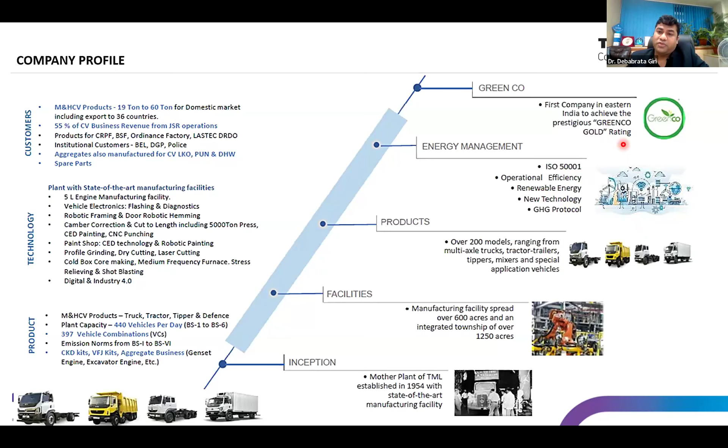We are an ISO 50001 company, and now we are embarking on a journey to use renewable energy. We have new technologies like CNG, LNG, EV, and H2ICE. We are the first company in Eastern India to achieve the prestigious Greenco Gold, which we received from our President, respected Droupadi Murmu, last year. And this is the pictorial form of our product portfolio.

Truck, then tipper, then tractor. I will explain what a truck is. This is the truck, used for carrying load, where load carrying capacity is 19 ton to 49 ton. Engine used are 5 liter and 6.7 liter.

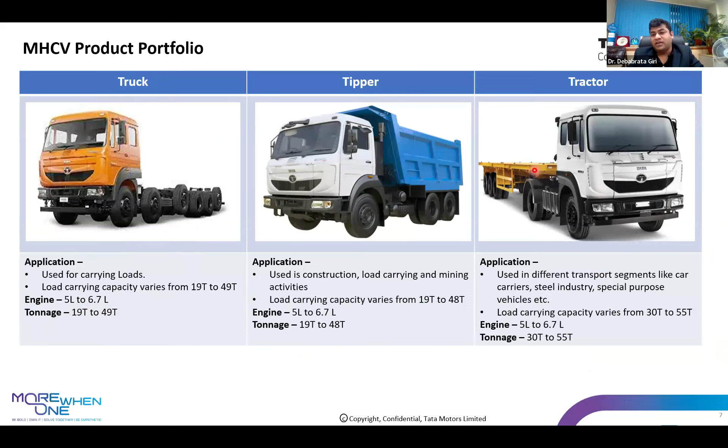Then tipper, used for construction, load carrying and mining activities. This is the tipping body, it can be lifted up for ease of operation. And these are the tractor, long vehicles carrying steel roll or car like that. This is the tractor.

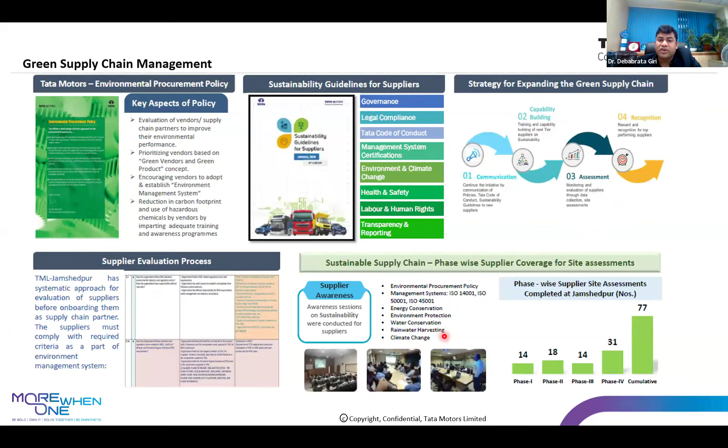I'll skip this. Green supply chain management, then sustainability guidelines for suppliers. We have made a guideline on how to achieve green supply chain. Then this is the strategy for communication, what to do. Then capability building at supplier end, periodic assessment at supplier end, and recognition for those who have done very well in sustainability. We have done a supplier evaluation process. Then these are some of the meetings we conducted for supplier awareness, and there is the number of suppliers covered.

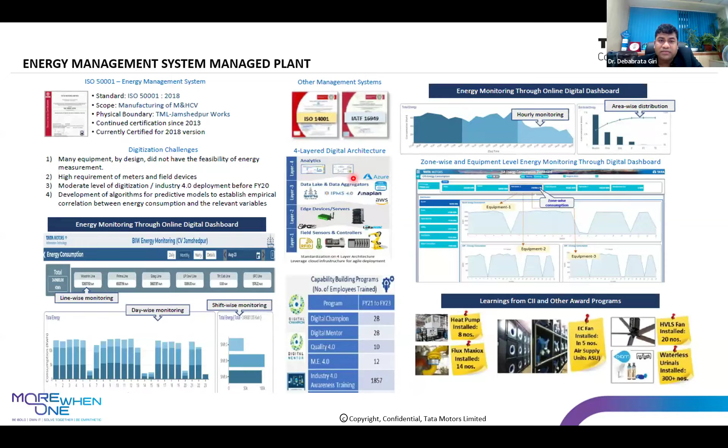Then there is something implemented at supplier end, and I will not cover this in detail, regarding energy management system, how we implemented Industry 4.0 and different types of digital architecture. I will not cover this.

Coming to the question, why electric vehicle? Why do we need to adopt electric vehicles? First of all, if you see the recent conflict between India and USA, it is all about fossil fuel. We are getting crude oil from Russia, that's why the US is not happy, Donald Trump is not happy. He's putting extra charges on what we are exporting to their country. So everything is about fossil fuel. If we adopt electric vehicles, our dependency on fossil fuel will decrease.

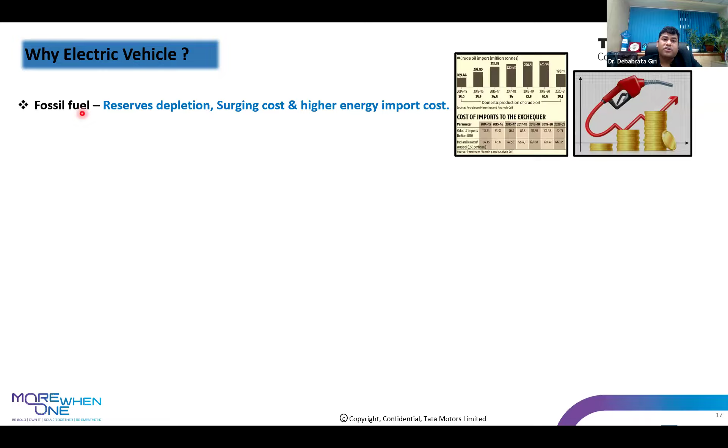Secondly, a country will grow if its trade deficit decreases, and a major chunk of what we import is crude oil. If we reduce crude oil import, trade deficit will decrease, and accordingly the country will grow. That is why we need to reduce this fossil fuel import, and that is why electric vehicles are important. Then there's also global warming and harmful emissions from ICE engines.

ICE engines generally contribute to CO2, CO, and NOx. So with adaptation of EV, global warming and harmful emissions will decrease.

Then coming to tailpipe emission, you will say if my source of electricity is not green, if I am burning coal to use the electricity, then what is the use of an EV vehicle? You will say total pollution is not decreasing because I am producing electricity by burning coal.

I will say there are two reasons to adopt the electric vehicle. One thing is, if I am burning diesel or petrol to run the vehicle, the efficiency of an ICE engine is very less, 18 to 20%. If I increase it, that is a big thing, improving the efficiency of an ICE engine. But the efficiency of a motor is very high, more than 90%. So one thing is efficiency.

Second thing is, if you are using an ICE vehicle, internal combustion engine, there is 100% chance that you are burning fossil fuel. But if you are using an electric vehicle, the source of electricity may be green or may not be green, but there are chances. If you are using electricity from solar energy, wind energy, or wave energy, then there are chances of green electricity. So two things: one is probability of generating electricity through green means, second is efficiency. That is why EV should be used.

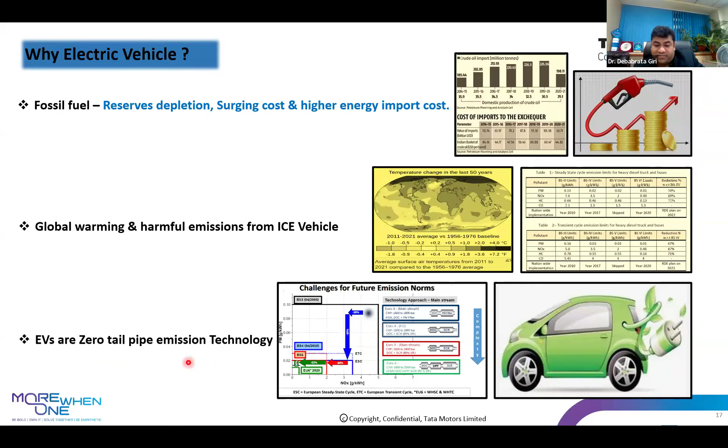Now coming to cost. If you see the cost per kilowatt hour year by year, it is reducing for high voltage battery. From 2013 to 2024, it has become one third, even more than one third, and we expect it will decrease further by 2026. That is another reason to adopt the EV vehicle, because cost is decreasing, so your initial cost for buying the vehicle will also decrease.

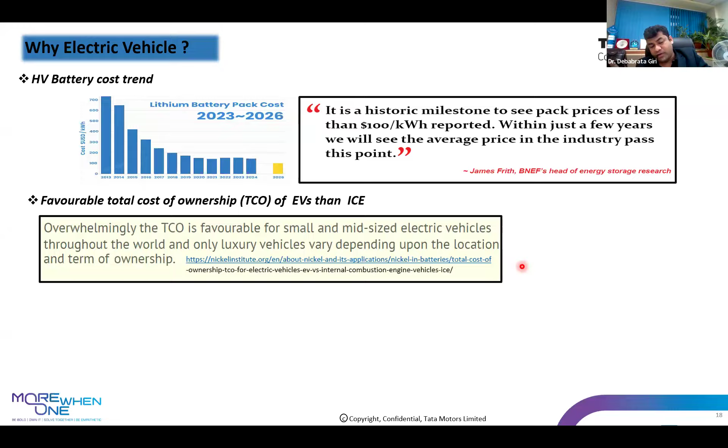Then total cost of ownership, I will describe this in a separate graph going forward. But total cost of ownership is also decreasing, and if you compare, the total cost of ownership is less than that of ICE, if you cover the total life cycle of a vehicle. Then high conversion efficiency, which I already discussed, the efficiency of an electric motor is more than that of an ICE engine.

Then coming to challenges of electric vehicles. First of all, EV architecture needs a lot of research and development. That is why Tata Motors got the first mover advantage in India for passenger vehicles. Tata Nexon was launched, and it has more than 50-60% market share, with other adopters following us.

Then infrastructure. In India, till now, charging station availability is a concern. So if there is no charging station, there will always be range anxiety, meaning for how many kilometers my vehicle will move and when I will get a charging station, that is still a concern. Then standardization of charging adapter, that we have already done. We raised this issue to the government of India, and now CCS2 type of charger has been standardized in India for both passenger vehicle and commercial vehicle.

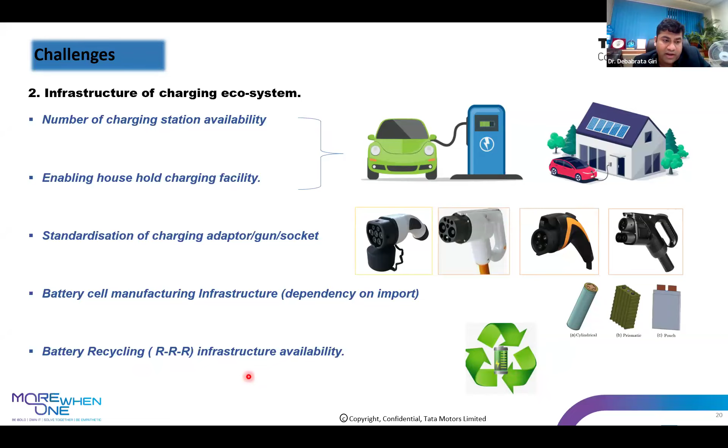Then another challenge is battery cell chemistry. How to select a good battery? There are many kinds of batteries, and this is the spider chart. The spider chart consists of specific energy, specific power, safety, performance, lifespan, and cost. So different types of lithium-ion battery have different performance considering different parameters. According to your requirement, you have to choose which battery you want to take. This is completely the OEM's responsibility, which battery they will take.

Then another thing is battery swapping technology. For battery swapping, you have to standardize the battery amongst all OEMs. Suppose one customer has a Tata Motors vehicle and another customer has an Ashok Leyland vehicle - the battery should be standardized so that they can be swapped with each other. For that, government and different OEMs should come together to make this available.

Then investment required. Now all OEMs are going forward for investment. Government is also investing on that, and government is providing discount through FAME. If you go for an EV vehicle, you will be charged only 5% tax, but for an ICE engine, you will be charged 18%, which before was 28%. If you go beyond 1500cc, you will be charged more than 40%. So government is already doing that - less taxes.

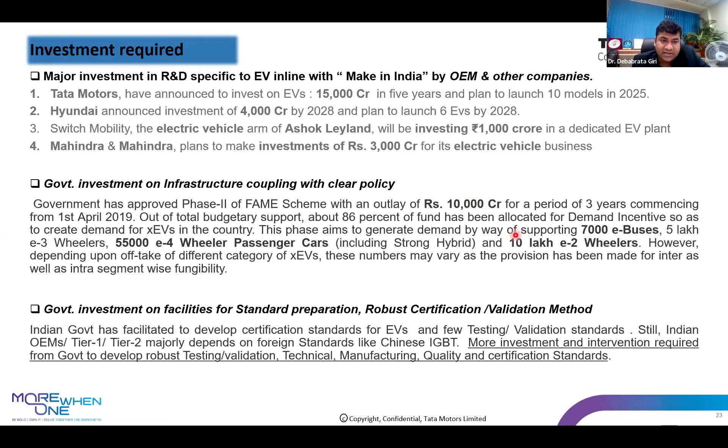Then second is customer sentiment. Still, customers are thinking that range is an issue, initial cost is an issue. So these are the challenges.

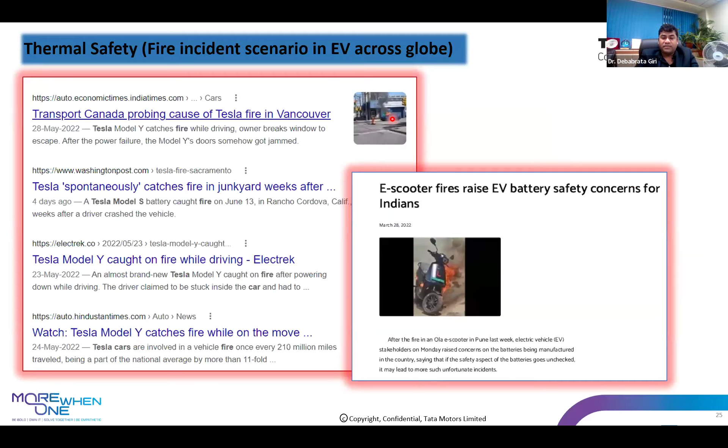Then thermal safety - you must have seen many news reports that Ola scooters have burned, many passenger vehicles have burned. That is the thermal issue. These are the challenges. For Tata Motors, you have never seen such an incident because we have developed a good thermal management system that takes care of the heat through traction cooling system as well as battery cooling system. We have a very automated system developed for this, and with this we are managing the thermal part of it.

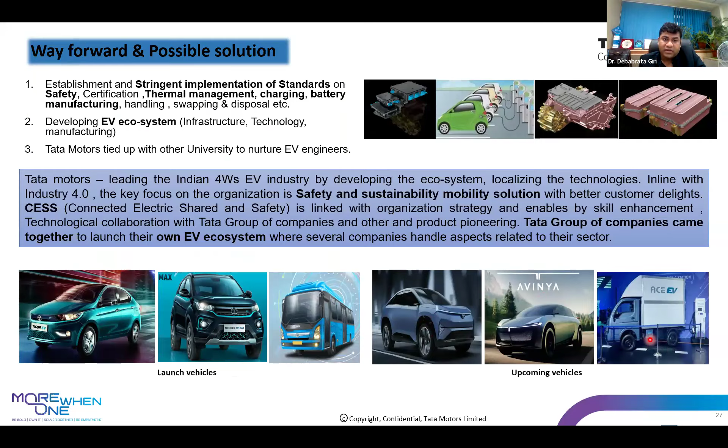And these are the way forward. In Tata Motors, we have launched passenger vehicles, buses, different high premium passenger vehicles, and small commercial vehicles that we have implemented and launched. And this will be the next EV vehicle we will be launching, called Avinya. We have already showcased this vehicle at Auto Expo, and we are going to launch this.

But despite contributing only 3%, trucks contribute 53% of the total particulate matter and 34% of the total CO2. So in short, you can say that trucks are contributing most to the pollution. So it is more important to electrify the giants - giants meaning trucks. It is more important.

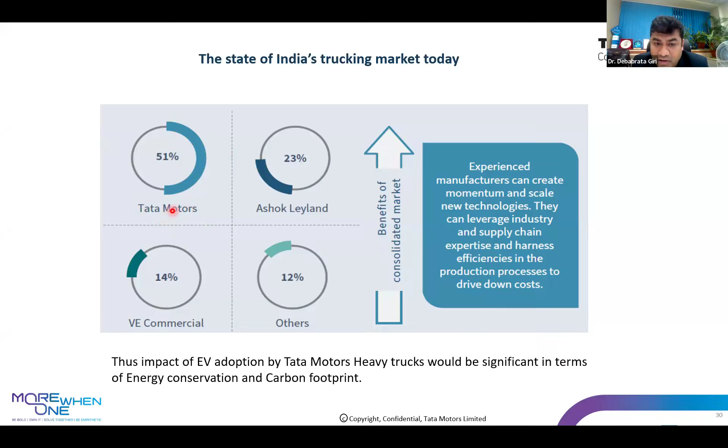Similarly, you can see this is another graph - if by 2050 we do electrification in heavy commercial vehicles, we'll have 9.6 million EV trucks on the ground, which will reduce 2.8 gigatons of CO2 emissions, equivalent to planting 46 billion trees. So you can see the impact - 46 billion trees. And likewise, this will be the effect on particulate matter and NOx.

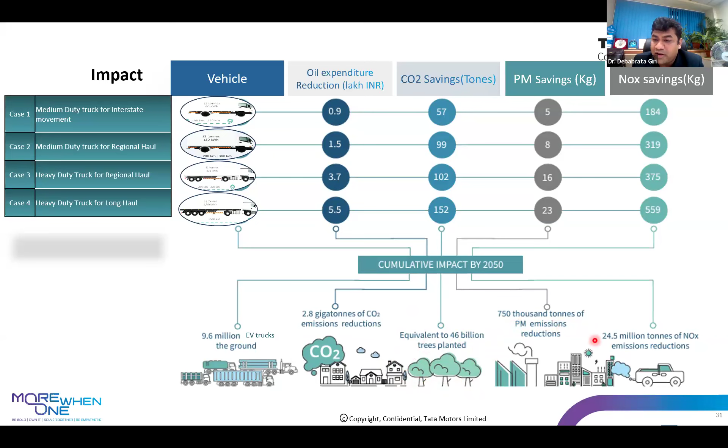Now the SCVs running on Indian roads are 40 lakh, and average distance per truck per kilometer is 80,000, and fuel efficiency is 3 kilometer per liter on average. But if it is a small truck, it goes up to 4 kilometer per liter, and if it is a big truck, meaning 55 ton, it is even less than 2. So average efficiency I have considered is 3 kilometer.

And energy consumption for electric, if I adopt electric vehicle, then it is only 1.2 kilowatt hour per kilometer. So diesel consumption per truck is this much, and total diesel consumption in billion liters is this much. Can you imagine? We are consuming 106.7 billion liters per year. And if you consider the calorific value of diesel, that is 36 megajoule, that is 10 kilowatt hour, then this is 1067 terawatt hour per year.

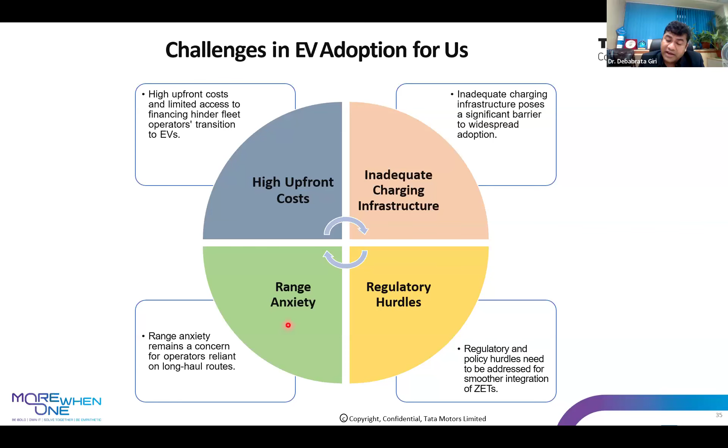Then we have discussed this driving innovation in EV. Then challenges also we have discussed, that is high upfront cost, inadequate charging infrastructure, regulatory hurdles, range anxiety. And then some suggestions on how to do faster integration of EV - successful EV deployment, operational feasibility, public-private partnership, and air quality impact. And this is the plan for scaling up EV adaptation.

And you can see we have made two types of electric vehicles. One is Prima 55 tonner tractor that already we have provided to Tata Steel. And these are some photographs when we launched this in March 2024. This is TV Narendran, MD of Tata Steel. Then Girish Wagh, our CTO. With their presence, we handed over some electric vehicles to our customer.

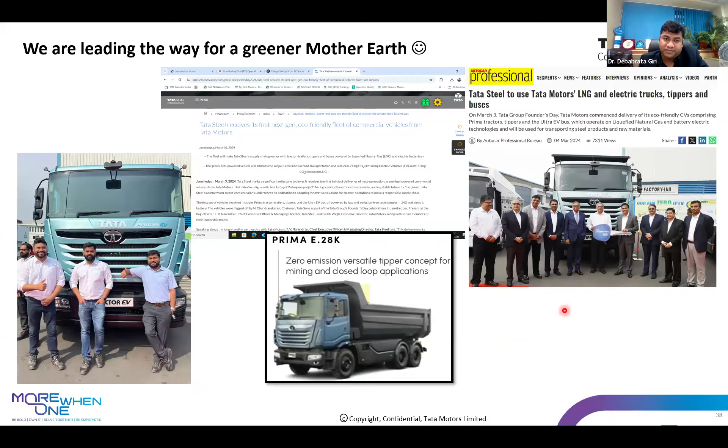That's it. Do you have any query regarding electric vehicle till now? Hello? Am I audible? Yes, yes, yes. If anybody has any query, you can ask me, because after that we will be moving to LNG and advanced systems in quality.

Sir, one question I want to ask. We are just, you told that we are moving to the electrification of heavy vehicles to reduce the CO2 and NOx emissions. So what about the production of electricity using coal or other factors that also contribute CO2 and NOx to the environment? So how will it be impactful, helpful to the environment?

See, there are three ways how it will be helpful. One is efficiency of internal combustion engine is only 18 to 25%. Efficiency of electric motor is more than 90%. So if you consider the efficiency, then electric vehicles are more efficient.

Suppose a truck is 49 ton. Out of 49 ton, 22 ton is the weight of the truck itself. So the payload that the customer will be carrying is 49 minus 22. That is the payload. For that payload, the truck driver or truck owner will be getting the money.

If I add both battery as well as engine, then the weight of the truck itself will go high, so the payload will decrease. That is why it is not advisable to bring both technologies into the truck segment, at least.

Thank you very much, sir. If anyone doesn't have any query, then we can move to the next chapter, the next advancement in quality. Should we move? Yes, yes, you can move. Thank you.

Coming to the next technology, that is LNG - basically LNG plus CNG. If you see, LNG and CNG have no difference; the composition of both is the same, methane CH4. The differentiation is only in how we are storing it. For CNG, compressed natural gas, we store methane at high pressure, 300 to 400 bar. But in LNG, liquefied natural gas, we store it at minus 162-163 degrees centigrade.

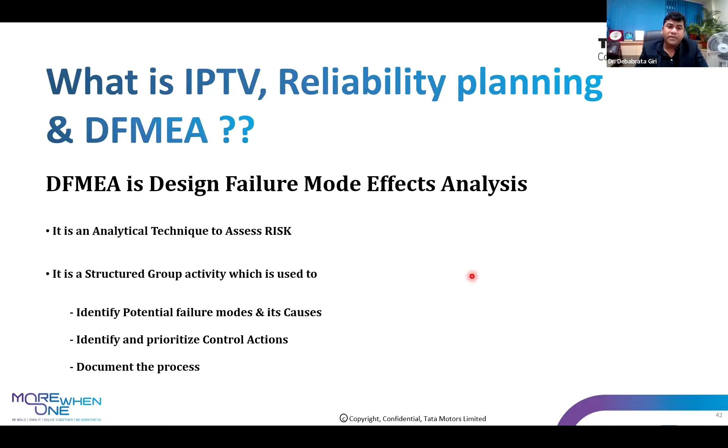It is the concept of DFMEA. So how is DFMEA done? This is the DFMEA sheet. Actually, there are many prerequisites to DFMEA. It is a very long process. I will not explain that because it is already 1 hour gone.

So in DFMEA, what we do? First, we write the function of a component. Suppose it is a seat - what is the function of a seat? We write it down here, then the requirement of the seat. Then potential failure mode - what is the potential failure mode? What can go wrong - no function, partial or degraded function, intermittent function, or unintended function.

And there is a standardized tool for how to identify this. There are pre-DFMEA documents. You have to use product structure tree, item function requirement, boundary diagram, parameter diagram, and robustness sheet. There are ways and means to identify these failure modes during design, which we adopt.

Then coming to whatever failure mode we have identified, we note the severity of those failure modes - what should be the severity. Then what are the causes of those failures? What design prevention actions can we take? What kind of design detection can we take? And what will be the recommendation action? So whatever we are designing - for component, subcomponent, assembly level, or vehicle level - we do this DFMEA, and only after completion of DFMEA do we launch the product. And whatever detection control we mention here, we do rigorous validation of the part and vehicle.

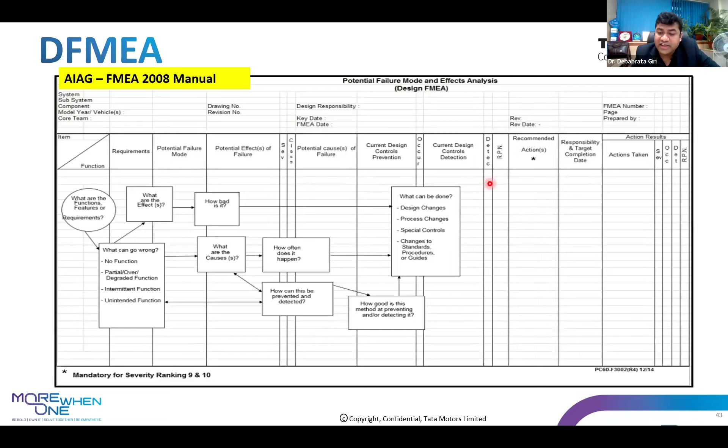So based on that, a detection ranking is given, and after multiplying severity, occurrence, and detection, you get an RPN number - Risk Priority Number. This RPN provides the priority to that particular failure mode. There is a scale for all three - severity, occurrence, detection - starting from 1 to 10. So the maximum is 10, minimum is 1, and multiplication of these three will be maximum 1000.

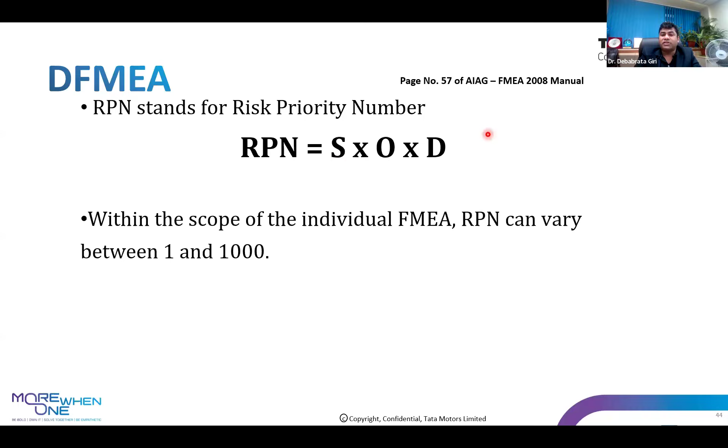Here is an example I have cited. Suppose failure mode A and failure mode B. For A, severity is 9, occurrence is 2, detection is 5 - the RPN number will be 90. For failure mode B, severity is 7, occurrence is 4, detection is 4 - the RPN number will be 112.

There is a table for how to rank the severity. Suppose one failure affects the safety of vehicle operation and it is non-compliance with government regulation, then severity will be 10. If it is without warning, severity will be 10. If it is with warning, severity will be 9. Accordingly, this ranking is decided.

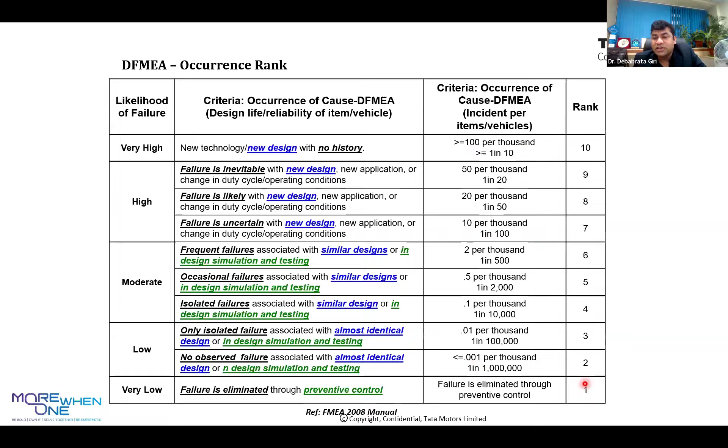Similarly, for occurrence, if the defect may occur 100 per 1000, ranking will be 10. If it is only 1, meaning 0.001 per 1000, ranking will be 2. Lesser is better, here also lesser is better.

Then coming to detection, detection is the same. So this is multiplication of severity, occurrence, and detection as the RPN number. Based on the RPN number, we have to prioritize the action and take the action, the prevention action as well as design action.

Then these are the basics. Now coming to this unified architecture. These are the objectives: we wanted to launch first time right, every time right, and a customer delight product. Then we want to integrate artificial intelligence into the quality system. Finally, we should get customer peace of mind. That is our ultimate goal.

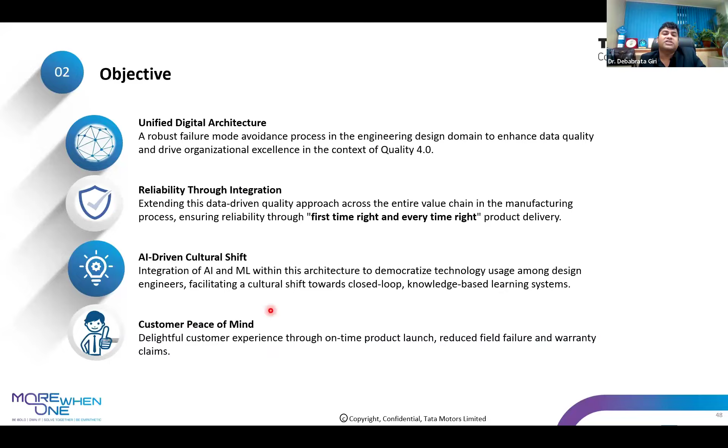So before that, what was the problem? Tata Motors field failure was very high. Our customers were unhappy, and our market share had decreased to 39%. This was the problem.

Systems were isolated, meaning there were multiple systems in Tata Motors and they were not talking to each other. There was no unified architecture, so that was causing delay in validation and new product launch. In the automotive sector, the more you launch new products, your market share will increase because customers adopt new technology. Because of disengaged different departments, our quality systems were not good, and due to high warranty cost, the product cost was also increasing.

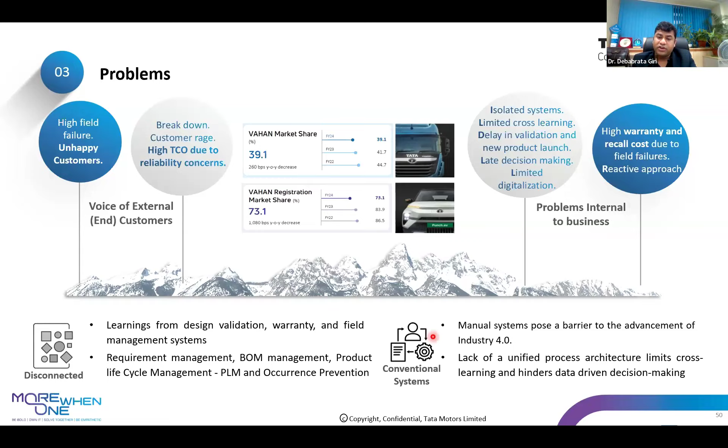So this was the problem: basically a disconnected and conventional system. There was no Industry 4.0. So what we did was standardize the process. Why is standardization required? Currently everybody is using artificial intelligence.

But one demerit of artificial intelligence is that it is a garbage in, garbage out process. Whatever prompt you provide to AI, whatever database AI is using for calculating or running the algorithm, a similar kind of response the AI will give. Suppose artificial intelligence is using its algorithm from a database, and in that database 100 people have written that the sun rises in the west, and 100 people have given a prompt that the sun rises in the west — accordingly the AI will give that output. That is one demerit of artificial intelligence: if polarization of data happens, artificial intelligence will give you the wrong answer.

That is why standardization of processes is required. Since we have standardized the DFMEA process, we ensure that this has been standardized across all functions. So this is the standardization and digitalization of the DFMEA process we discussed.

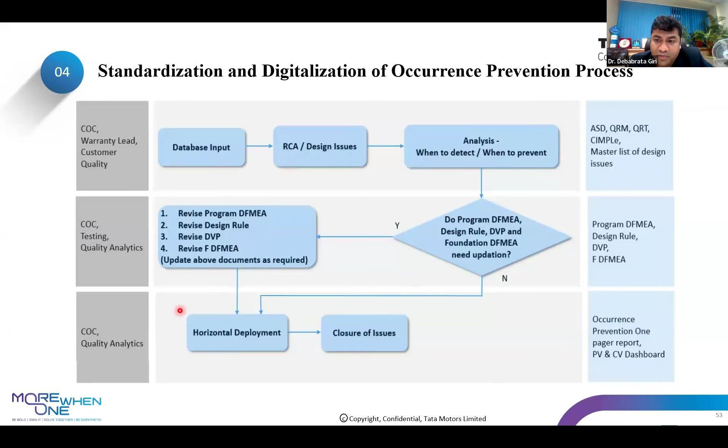And then this is the action part. Suppose we get one concern — we have a CIB system, critical issue voucher. We raise this issue in the CIB system, then it goes to the champion, then developer, then part provider, validator, then production part provider. Based on validation and closure, we close the issue in this workflow. This is the unified architecture we developed at Tata Motors.

Then for new technology, like EV, H2ICE, LNG, CNG, we benchmark the product, go to the market, go to our competitors, and look at different technical papers written on it. Whatever knowledge base we have, based on that we identify the failure modes and include them in the foundation DFMEA.

Past design learnings, and during validation, whatever concerns we get before launching the vehicle, we do extended validation. We run the vehicle for 4 lakh, 5 lakh kilometers, and whatever issues we get during validation, we get those corrected in our design and production. Then only we launch the vehicle. So whatever issue we get during validation also comes to foundation DFMEA.

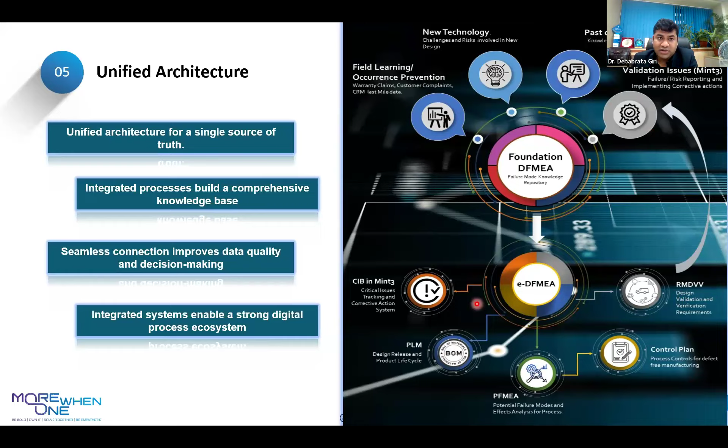After this unified architecture, we implemented artificial intelligence into the system. How did we implement it? First is building the knowledge repository, which I explained in the last slide.

Then we used artificial intelligence without breach of data security. We didn't want to share our data with the AI service provider, and that is the most important thing. We have developed our chatbot locally at Tata Motors, so that data will not be shared with ChatGPT, OpenAI, Perplexity, or other AI service providers.

Once we developed it in-house, what is the output of this AI? Now you don't have to ponder over data, which is in silos. You don't have to go to the silos and ask each department. You just ask the AI: what is the issue in X platform for Y aggregate, issue of X component fitting on Y aggregate in Z platform, or issue with severity higher than 3 on X model in Y platform.

Whatever you ask, suppose you ask what issues we faced in thermal management in electric vehicles, you will get the response from the past defect history, and it will provide solutions too. Whatever actions we have taken in the past as countermeasures for those defects, that data will be displayed. So it becomes very handy and easy for the designer to take action.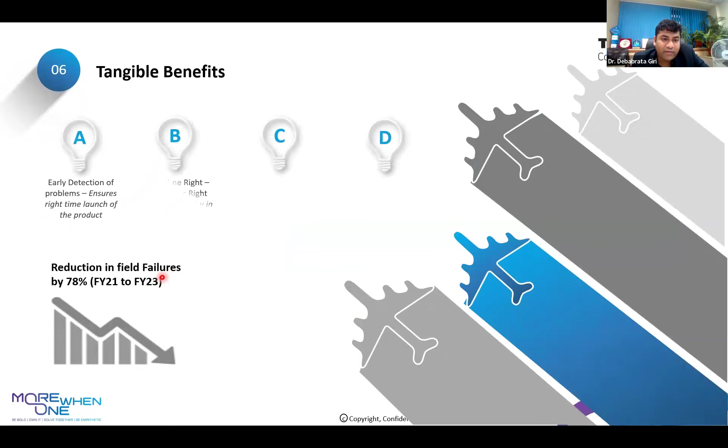So these are the benefits. Reduction in field failure — this is actually 2025, it was wrongly written in a hurry. 78% field failure was reduced.

Then first time right, every time right, and customer delight products used. Whatever new product we are launching, defects are very less, and cost of poor quality reduced by 78%. Productivity was improved, and cross learning between engineering and manufacturing. As an intangible benefit, during this process we applied for 6 patents from Tata Motors, and we got all 6 patents.

Market penetration was increased — now we have more than 50% market penetration, and brand value increased. These are some intangible benefits. That is why I discussed unified architecture, then positive customer output, and the journey ahead is now we want to horizontally deploy it in the manufacturing process.

So with this, advanced quality tool is finished. If anybody has any questions, please ask.

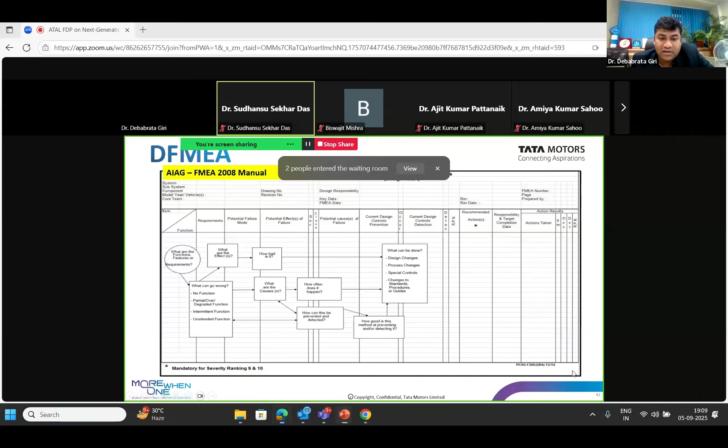I think many will have doubts regarding DFMEA because it is a very advanced tool and we are practically using it. So participants can ask questions.

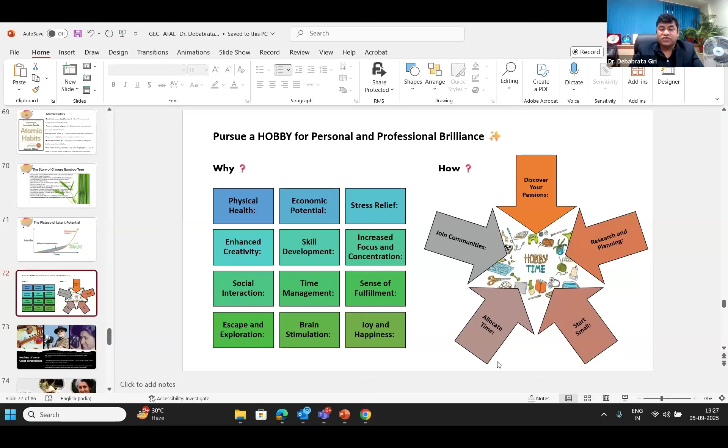So it is more important to strike a balance between work and life. So please pursue a hobby like this. Great men have pursued their hobbies. Like APJ Abdul Kalam, he used to play the Veena. Modi Saab has photography. Lata Mangeshkar had photography. Similarly, please pursue a hobby. It will balance you and reduce your stress.

Basically, why am I showing my hobby? I'm not glorifying my hobby, I'm just requesting you to please pursue a hobby. That is more important. And at the last, I will recommend that you make a life statement.

The life statement should include vision, mission, education, then hobbies, health, spirituality, relationship, and legacy - what you want to contribute to the society. Please write it down very clearly what you want to do. Then get it signed from your friend, your teacher, or your parents, so that it will be documented, and proceed in your life accordingly.

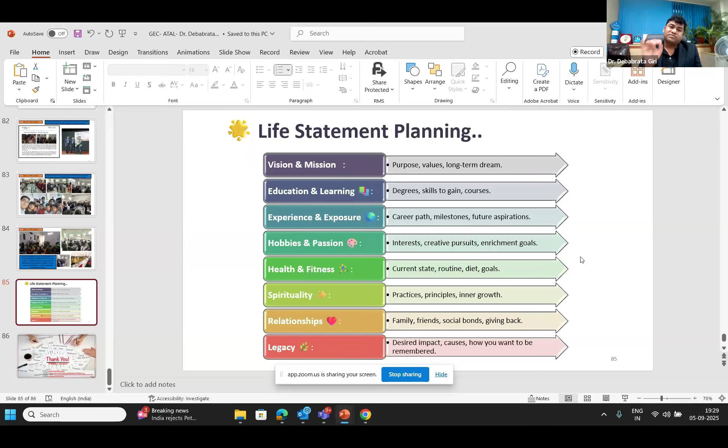But please sign a life statement. That is more important. I think we are done, and I have nothing more to share.

If anybody has any query, then I think only 1 hour was budgeted and we crossed it. Oh no sir, it is 1 hour and actually 30 minutes. It's okay. Any participants can ask any questions if you have any queries.

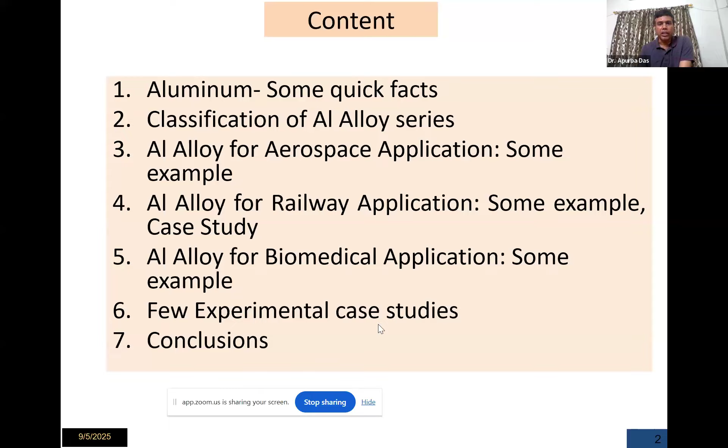As we know, aluminum is a lightweight material compared to steel. It has a density of 1/3, so its strength to weight ratio is always high—it has high specific strength compared to steel. So there is a huge advantage in weight, which is a governing parameter for aerospace industries, because weight is one primary constraint for aerospace industries.

Aluminum also has excellent corrosion resistance. It is anodizing friendly and manufacture friendly. It can be manufactured by rolling, extrusion, forging, casting, or in some cases additive routes. It is also weldable, which is one primary aspect of making this metal into any desired structure by cutting, welding, and fabrication.

Aluminum is 100% recyclable, giving it an embodied energy advantage, and its recycled feedstock is very high. So it can be used, and once its life cycle ends, it can be remelted and reused—that is one big advantage for aluminum. Aluminum is also widely available in nature, though it occurs in the form of bauxite.

Let me open my pointer. So 1350 is a 1 series alloy, used for power transmission because it has good thermal conductivity and electrical conductivity. Now the second category is the heat treatable alloy.

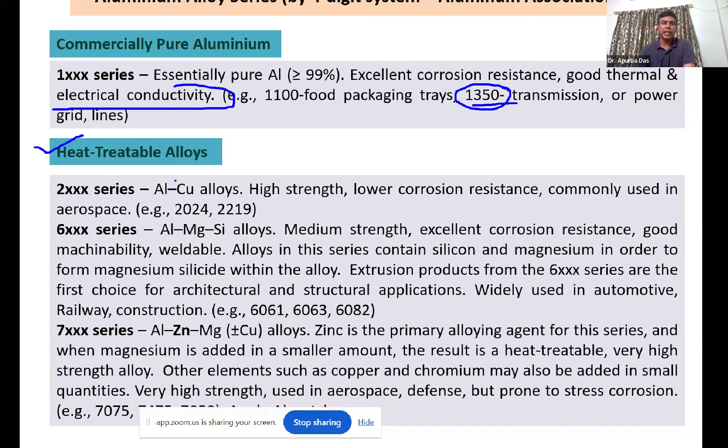Heat treatable alloy means we can perform heat treatment, which applies to the 2 series, 6 series, and 7 series. The 2 series is basically an aluminum-copper alloy, so copper is the main ingredient here. It has high strength and lower corrosion resistance, and is commonly used in aerospace because we need high strength, despite the lower corrosion resistance.

2024, 2219, these are the alloy used. Next is the 6 series alloy.

6 series alloy is aluminum-magnesium-silicon alloy, where magnesium is basically the governing main ingredient. So it is medium strength, having excellent corrosion resistance, good machinability, and weldable. Alloys in this series contain silicon and magnesium in order to form magnesium silicide within the alloy.

Extrusion products from the 6 series are the first choice for architectural and structural applications. It has wide application in the automotive domain and the railway domain, like 6061, 6063, 6082. I will explain these alloys because they have very good application in the railway domain.

Next is the 7 series alloy. 7 series alloy has zinc as the main ingredient, apart from aluminum, along with some part of magnesium and some part of copper. So zinc is the primary alloying element in this series, and when magnesium is added in a smaller amount, the result is a heat treatable and very high strength alloy. Other elements such as copper and chromium may also be added in small quantities.

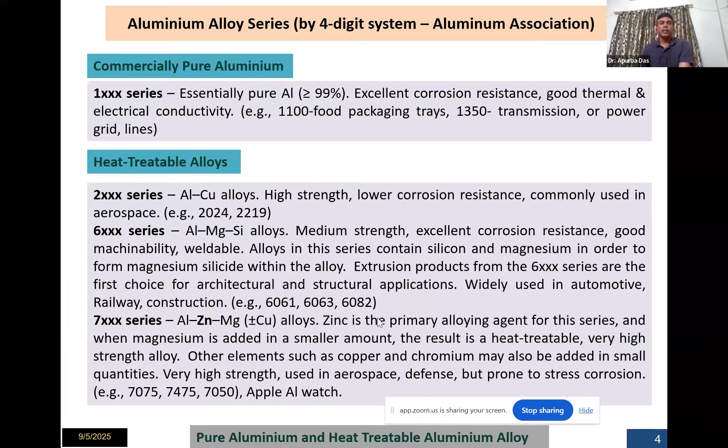Third one is the non-heat treatable alloy. Non-heat treated alloys are strengthened through cold working because they cannot be heat treated. So they need to be strengthened through cold working. Cold working occurs during rolling or forging methods and is the action of working the metal to make it stronger, and cold working increases the strength of the metal.

Alloying elements such as magnesium intensify its effects. In some cases, other elements can be added. So in this category, there are several series: 3 series, 4 series, and 5 series.

In 3 series, it is aluminum-manganese alloy. It has good corrosion resistance, moderate strength, and is commonly used in roofing or siding locations. This is generally used. And 4 series is aluminum-silicon.

Silicon is the main alloying element here, added in sufficient quantities to lower the melting point of aluminum without producing brittleness. It has good wear resistance, low expansion, and is used in automotive engine parts like 4032 or 4045 series.

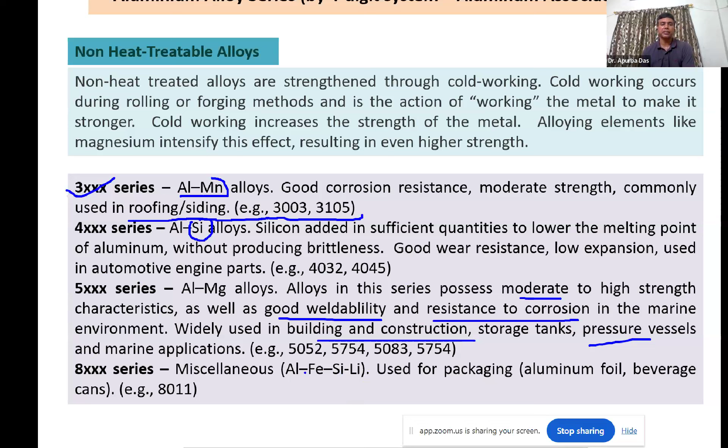So in a nutshell, these are the series of aluminum alloy based on their configuration. First series is pure aluminum, which has more than 99% aluminum.

Second series is aluminum-copper - copper is the alloying element. Third is manganese as the alloying element. Fourth is silicon as the alloying element. Fifth is magnesium - sorry, third one is manganese, fifth is magnesium. Sixth is magnesium-silicon alloy.

It is added with aluminum. Seventh, zinc is added as the main alloying element. 8 series is lithium, and 9 series is other alloying elements, which we may use in some cases.

So this is just a brief introduction about the different series of aluminum alloy based on different alloying elements added to aluminum, because pure aluminum does not provide that much good strength. It needs some alloy added, and based on this addition, some series are heat treatable and some are not heat treatable. Depending on the application, we can see which series of this alloy is applicable to which sector.

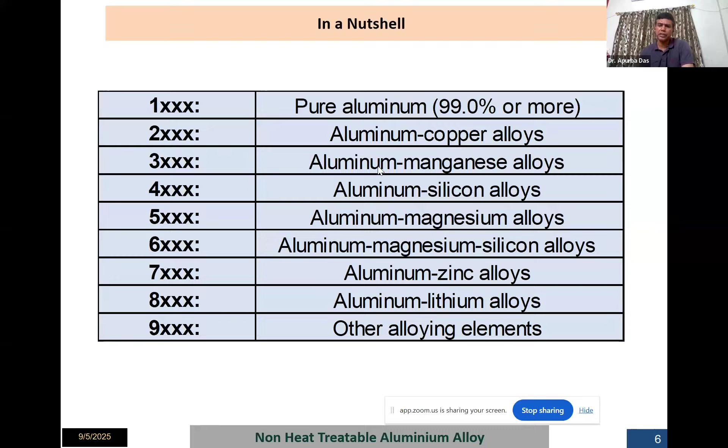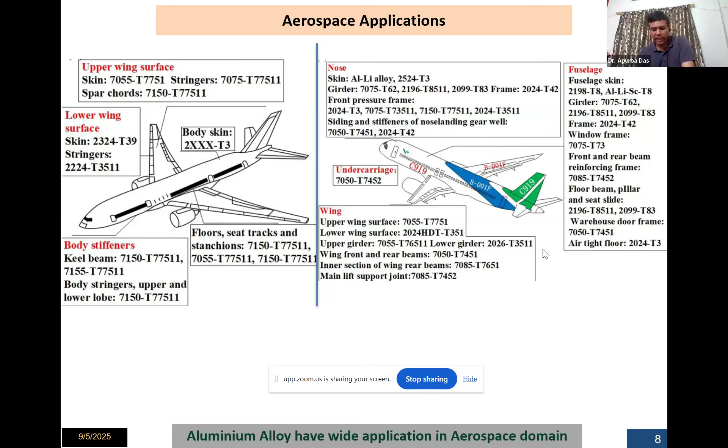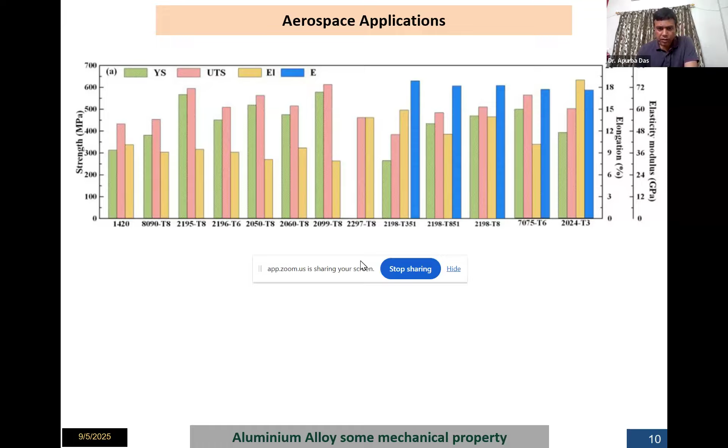The main objective of using this aluminum alloy is to reduce the tare weight. That means if the tare weight increases, then obviously the thrust needed to fly is high, the fuel consumption goes high, and a lot of aerodynamic effects disturb the motion. So the main objective is just to reduce the weight, and the best available and most comfortable material is the aluminum alloy. That's why aluminum alloy is widely used in the aerospace domain.

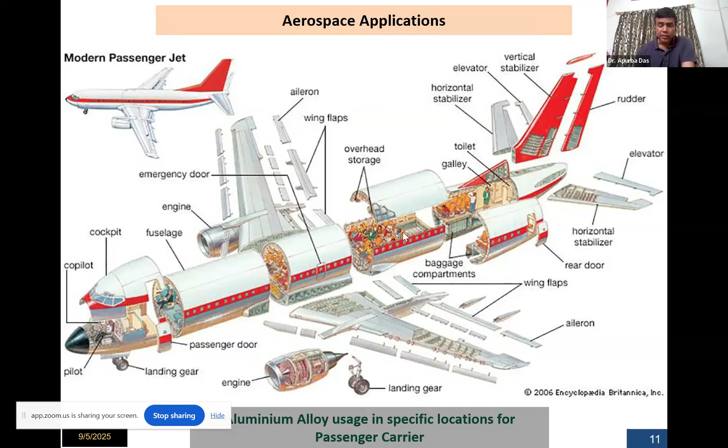In aerospace applications, the spectrum of aluminum alloy used ranges from the 1 series to the 7 series, though the 2 series and the 7 series are widely used.

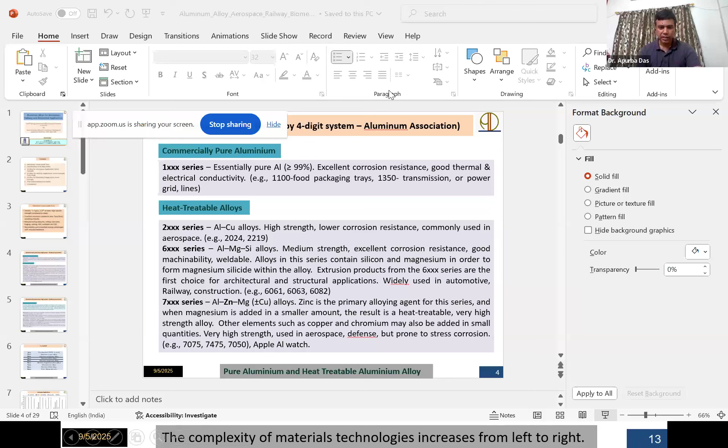As you know, aluminum alloy is not very capable of withstanding temperature. So in the aerospace or flight domain, there are two engines, which are basically gas turbines - we call them aeroderivative gas turbines. Inside the gas turbine, the temperature goes around 2000 degrees centigrade. So inside the engine we cannot use aluminum alloy, because it cannot take that much high temperature, unless we use some coating like alumina or zirconia.

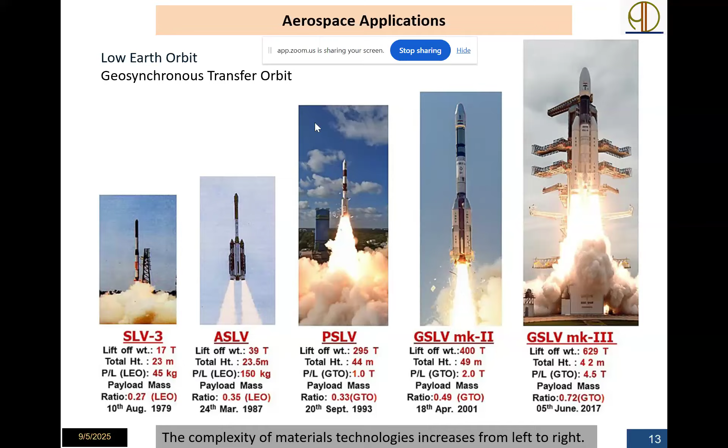So we need other materials which can withstand high temperature, like Hastelloy, Nimonic. In the gas turbine domain, where high temperatures exist, we cannot use aluminum alloy - there we need advanced alloys like Hastelloy, Nimonic, nickel-based alloys. Those alloys can withstand high temperature, and we also need to provide a thermal barrier coating, TBC. So that is one limiting area where we cannot use aluminum alloy in the aerospace domain.

Now I'm moving to aluminum in the railway location, or the railway domain.

In railway, we know that there are three modes of transportation generally we have. One is the metro, another is the passenger coaches, and another is the wagons, which is generally used to carry the commodities.

In the metro, previously our metros were built with steel bodies. Now, from the last 5 to 6 years onwards, metros are no longer manufactured with fully steel bodies. Now it is moving towards aluminum bodies, and India's first indigenous metro, Pune Metro, was built with an aluminum body.

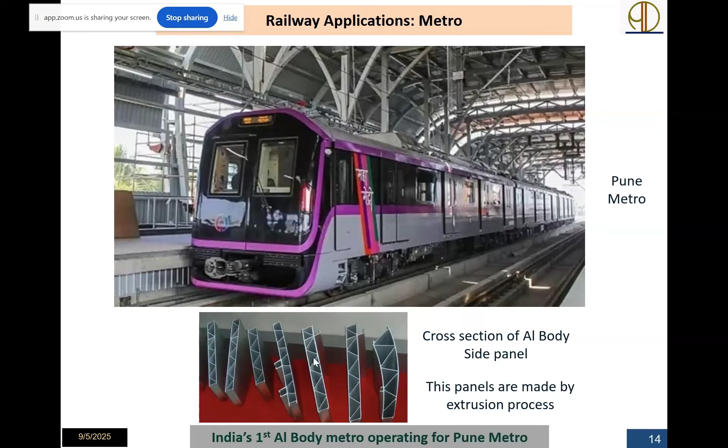This side panel of the aluminum body has a cross section something like this, where it needs to be lighter as well as provide sufficient strength. So stiffeners are added, and this kind of section is very difficult to produce.

You may be amazed that though we are manufacturing these aluminum body metros, we still need to import the extruded panel from overseas. So that is one research area or development area where Indian companies or Indian researchers are working.

These panels are generally imported from Europe or China. For the Pune metro, it was imported from China around 2017. The cross section of this aluminum body side panel is like this, and these panels are made by the extrusion process. So India's first indigenous metro, Pune metro, was completely built with the aluminum body.

And now onwards, the Surat metro, Indore, Kochi, and Baroda metros are all coming with aluminum bodies because it is lighter, the speed is also going to be higher, the fuel consumption is going to be lower, and it will have higher throughput.

Do you know how it is unloading? The tippler is used, that means the wagon comes and there is a coupler, and there is another coupler. So these two couplers are detached. This becomes a single quantity, and a tippler holds this entire wagon and tipples it, meaning it is tipped from the top side up, and the entire coal comes down due to gravity.

Now imagine that this metal is relatively hard, but the aluminum version is not that hard to sustain the tippler pressure. I mean, it can easily take the load of transportation and carry all those things during dynamic and other locations. But the tippling is just pressurizing, the tippler pressurizes and revolves the coal. So usage of the tippler for this aluminum wagon may not be advisable. That's why for the BOXNHL wagon, which is basically used at power plant locations for carrying coal, it is not recommended to use the aluminum version. But for other locations apart from the power plant, it is advisable. So there are possible areas where you can use aluminum.

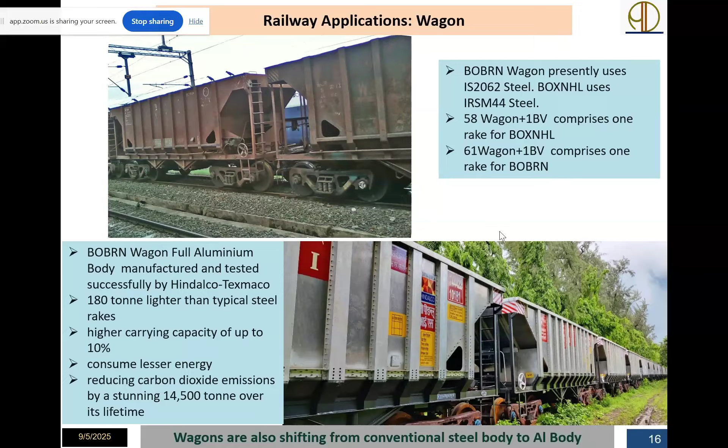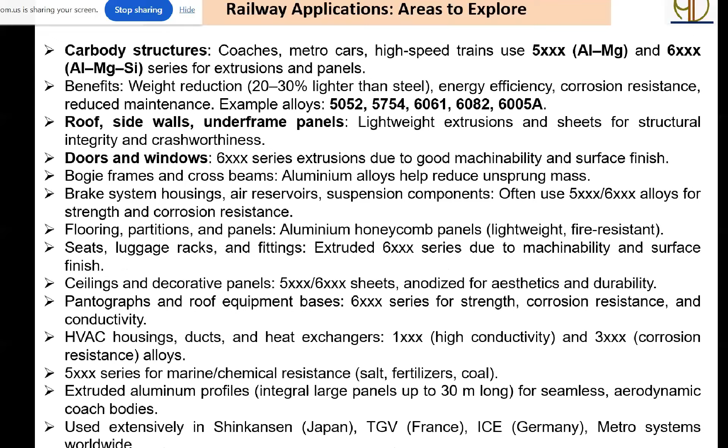So now we move to the next topic, application areas. What are the areas we can explore, like car body structure for metro, high-speed trains - 5 series and 6 series aluminum alloy can be used. We can get 20 to 30% lighter than steel with these series. Apart from these, we can use them for roof, sidewalls, and underframe panels. One good advantage is that from a structural integrity and crashworthiness point of view, aluminum alloys are quite good.

We can use it for doors and windows, bogie frames, and brake systems. The brake system is a very unique thing in the railway - it uses air brakes, and when the pressure is less than 5 kg per centimeter square, the brake applies. So the brake system can use aluminum alloy. Flooring location, interior like seating, luggage racks, fittings - these series we can use. Ceiling and decorative panels we can use. Pantograph in the overhead equipment (OHE) we can use.

HVAC we can use in the duct, in the heat exchanger location. Marine and chemical resistance applications we can use it for. Let me give an example to elaborate this.

We know that wagons are used for carrying coal, commodities, or other things. But Indian Railways are looking for a good solution for carrying salt, because if you carry salt in a conventional wagon made of mild steel, it will corrode within a year. Initially, a composite fiber panel was thought of, but fabrication of the composite fiber on the steel structure, and again its dynamic aspect, did not give favorable results. So that's why the 5 series alloy with some sort of coating can be used for carrying salt and fertilizers, which are corrosive. That is one good example.

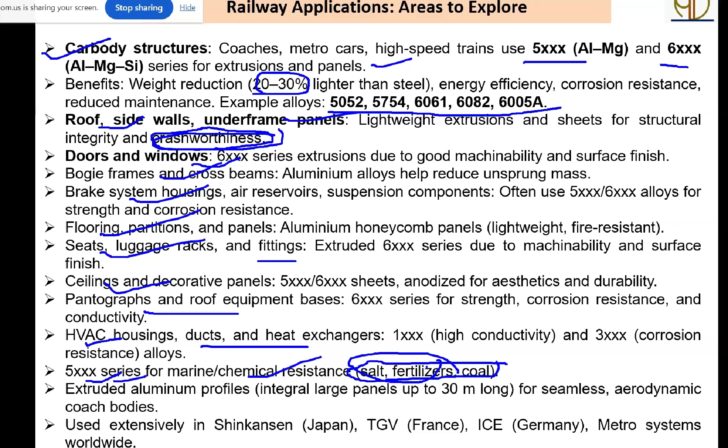Another thing is that these extruded aluminum profiles, which can be up to 30 meters long, can be produced, so that we need not go for welding for a particular coach. So for a single coach, we can go for a single panel. Worldwide, the Shinkansen, the Japanese high-speed carrier train, reaches speeds around 500 kilometers per hour. TGV, Train a Grande Vitesse, literally high-speed train in France, has speeds around 350 to 400. In Germany also, there is quite some use of aluminum alloy in various locations.

Now we come to a very good example of the OHE equipment. OHE means overhead equipment. You can see this is a tunnel. In the tunnel, there is limited space, so the overhead equipment or electric wire has no sufficient space. That's why a special type of arrangement is designed, called the rigid overhead catenary system, ROCS. You can see this is the ROCS, rigid overhead catenary system, this one.

And this is the closed view. This is the closed view. And the profile of this rigid catenary system is this.

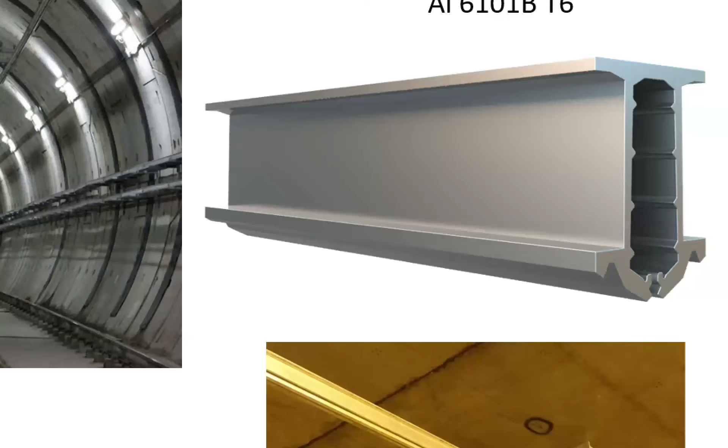And inside this, there will be a copper wire, which is basically the live electric wire, which will touch the pantograph and it will glide. So this is made of aluminum.

6101B T6 alloy. And it is 100% indigenous, because this kind of thing was available in European countries, but a few years back it has been indigenously developed, and now it is manufactured for the OHE equipment.

And I have worked for this project with one Noida-based company, PPS International, where we performed its performance testing, its structural parameters, and its running speed, like when it goes to 100, 150, and 200. So how its behavior is going to happen.

So this panel has been designed up to a speed of 200 kilometers. So maybe if time permits, then I can show some of that.

So we did this analysis for this - you can see that this is the rigid overhead catenary system. We did this analysis with various types of load, like 80 kilometer speed.

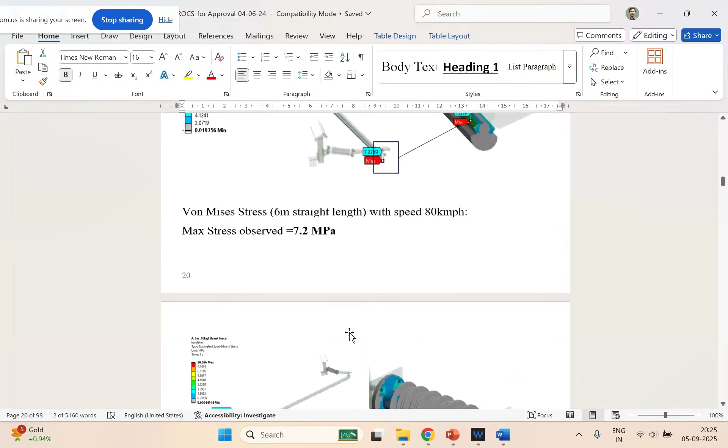Then one is the panel length is 6 meters. Then what stress is coming for each and every component when the speed is 160. Then we performed all this type of analysis.

So now it has been accepted by this Indian Railway governing authority, known as the RDSO - Research Designs and Standards Organisation, which is situated in Lucknow.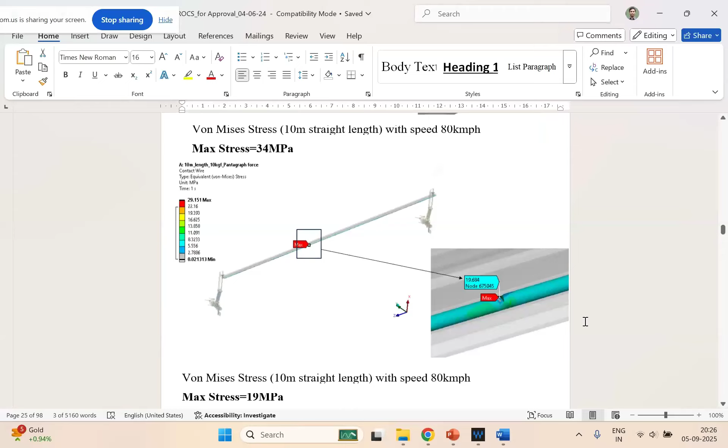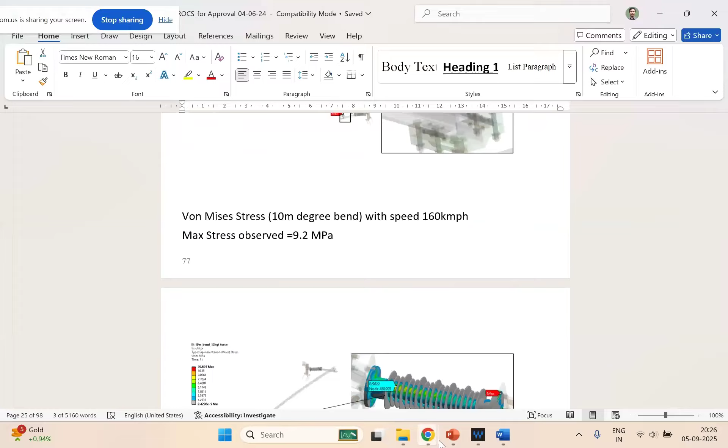So these are some examples of the analysis results which we performed for this ROCS. I'm not going into details about all these technical details or design parameters and stress values. But anyway, we can come back to our original presentation, that this is a very good example where we can use the...

aluminum alloy. Aluminum 6101B T6 is used because in India, there are a lot of tunnels and locations where there are limitations of space, or underpass locations. So in all these locations we can use these things.

Now, the second one is also very important. I worked for this project, and now it has been accepted by RDSO, and it is presently being implemented. So you may have seen that in the electric location, where the pantograph goes in this location.

So this is the contact wire. In the contact wire the pantograph touches and it slides. So this is called the mast.

You can see that this is called the mast. This is called the stay tube. This is called the bracket tube. This is called the register arm, and this is the contact wire. So there are two types - one is the beam type and this is the tube type.

So presently this material is used as galvanized steel. Now this galvanized steel is quite heavier, and in some cases it creates problems due to wind load or some other kind of hazardous application.

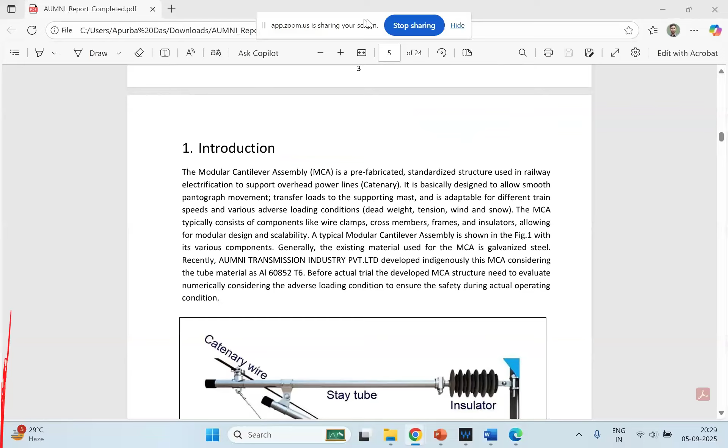So maybe you can see that there are various types of loads, like vertical load, wind load, then snow load. Snow load means in some cases when it goes to the hilly region, then on the catenary wire there will be snow.

So then radial pull load, stagger load, all the different types of load, and then in some cases there will be a straight track, in some cases it will be the curved track.

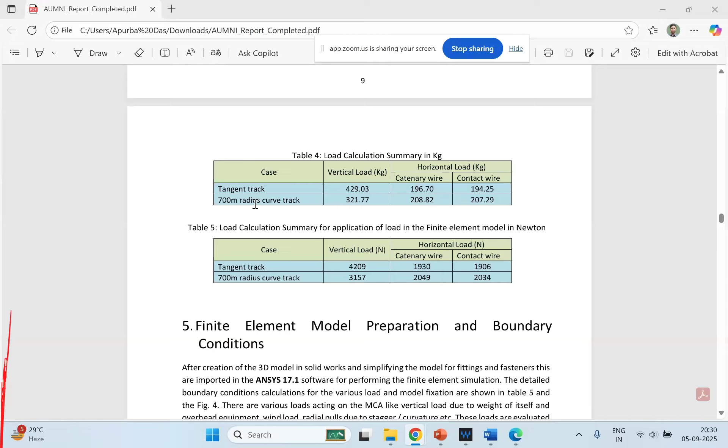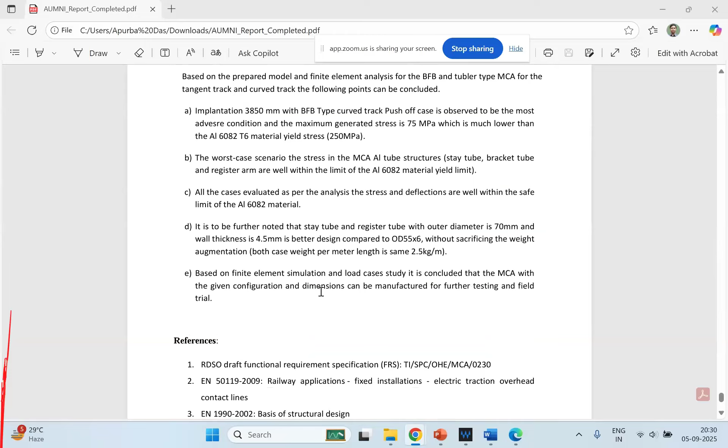Then we performed this finite element analysis, and based on its stress and deflection values, we determined the specific sizes. So we got that 55 OD and 6 thickness.

We got that 70 millimeter and wall thickness 4.5 is a better design, and the material is aluminum 6082. Presently it is being implemented at a particular location. It is the RDSO draft specification, and it comes under TI. RDSO has different departments like mechanical, civil. TI is the traction department.

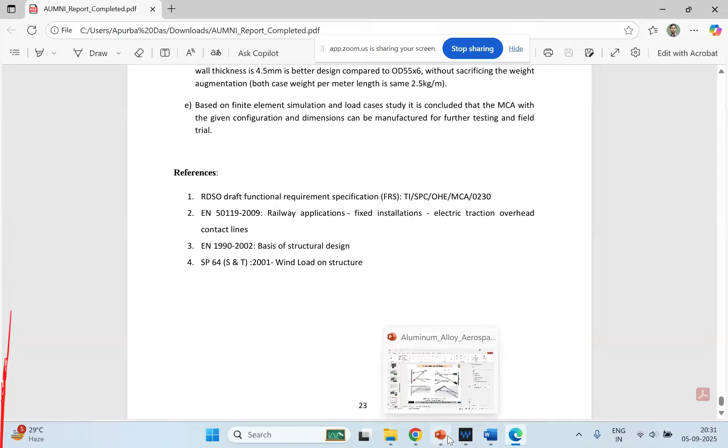Now we are coming back to the next one, which is very important. Let me give one example. Suppose your wagon is carrying some commodity and there is some overhead wire. If you want to load material on the wagon, how will you do it? You have to load it by crane or some other means, because you cannot load from the top since there is a live contact wire or electric wire there, through which the pantograph touches and the wagon runs. So there is an arrangement called the retractable rigid catenary system.

The retractable rigid catenary system uses an aluminum panel, inside which there is a live wire, which is a copper wire. You can see this is the cross section. If I take a cross section here, I get this kind of section. This is the live copper wire, through which the current flows.

The beauty is that when you need to load material from the top, you retract the entire thing, and it is foldable. You can see there is a hinge, so it folds. The entire assembly moves to one side and that location becomes empty. Now from the top, with the help of a silo, you can load the wagon, and the loading can be done within a minute. Once loading is done, it is retractable, so it goes back to its original shape, the pantograph works again, and you can run your wagon throughout the location.

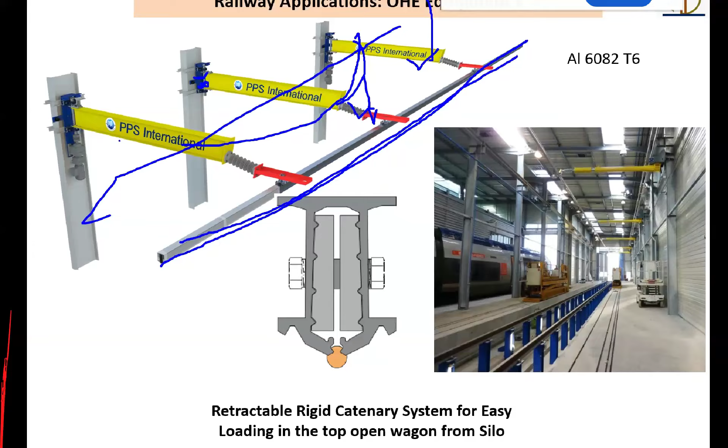This is a very innovative project, and I am involved with this project where PPS International is the main stakeholder. They have provided us this project at IIST.

Now moving to other things, there are a lot of applications in the railway domain apart from metro, coach, passenger coach, and wagon. A lot of other locations like overhead equipment or some railway track equipment can also use this.

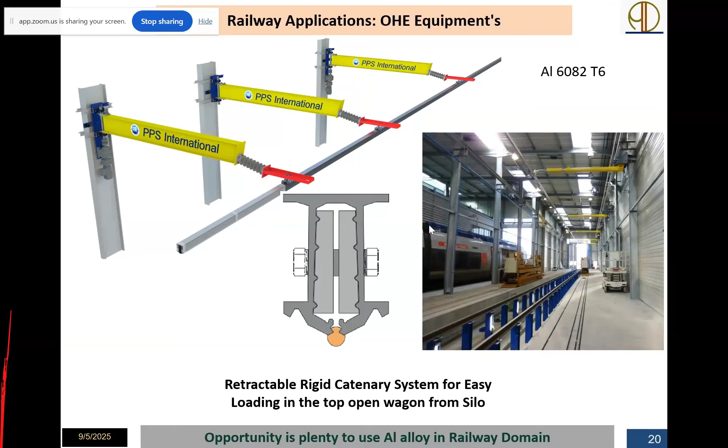Now we are coming to the last part, the biomedical application for aluminum alloy. We need to first keep in mind that aluminum alloy is not as biocompatible a material as titanium alloy or magnesium alloy. That means it is not a good fit for internal human body applications as an implant, because its biocompatibility is quite less than titanium or magnesium alloy.

Still, there are a few locations where we use it, like artificial limbs, which are not directly going inside the human body - we are not implanting or operating inside the body. So for artificial limbs, prosthetic components, joint parts, external fixtures, we can use aluminum 2 series, 5 series, 7 series, especially 6061 and 7075, for lightweight and machinability applications.

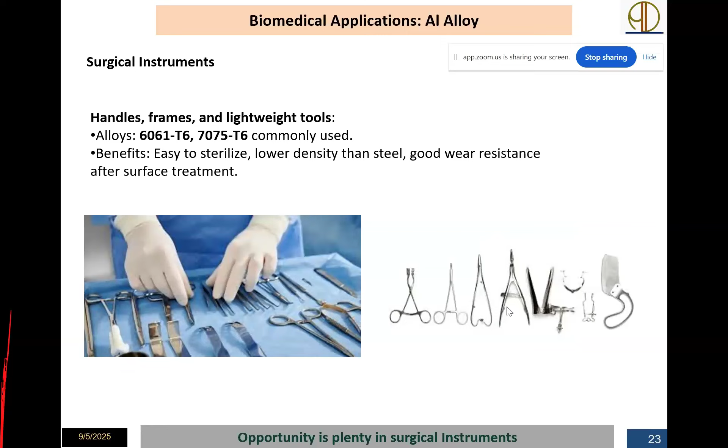Surgical instrument, as I told, handles, frames, the lightweight tools. Aluminum 6 series, 7 series is used. You can see that all types of surgical instruments nowadays are using aluminum with some sort of anodized coating.

Biomedical devices and equipment - wheelchair, hospital bed, stretchers, rehabilitation equipment - that means the peripheral of the medical sector, where aluminum alloys are widely used, like aluminum 5 series, 6 series. It is light, durable, and has good corrosion resistance. Obviously it needs to be anodized. And like others - crutches, walkers, braces, support devices.

So all the peripheral equipment locations, the aluminum alloys are presently being used. And in the medical industries, the peripheral domain, the market size is also huge. I know that a lot of companies are also procuring this kind of peripheral devices, and the uses of aluminum are huge.

A few other research applications, like aluminum matrix composites reinforced with bioceramics like HAP, titanium oxide, and zirconia - in that case we can use them. And load-bearing implants like bone substitute cases - some cases now it is slowly using some ceramic addition of bioceramic.

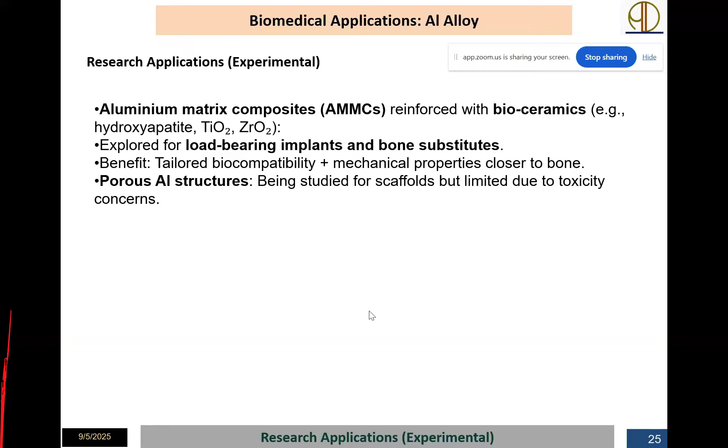Toxicity is there. Now I will take just two examples of one of our recently concluded papers. One we did a study for the aluminum 6061 T6 alloy, and another is the aluminum 7075 T6 alloy.

You know that aluminum 6 series and 7 series are heat treatable. So once it's heat treatable, its strength obviously enhances, as well as its tensile stress also increases. So we did a heat treatment cycle.

Initially we increase the temperature from 0 to 540 degrees centigrade over about 100 minutes, and then hold at 540 degrees centigrade for 1 hour, and then suddenly cool down to ice cold, reaching -20 degrees centigrade. And again, temperature increases to 200 degrees centigrade and holds for 3 different durations.

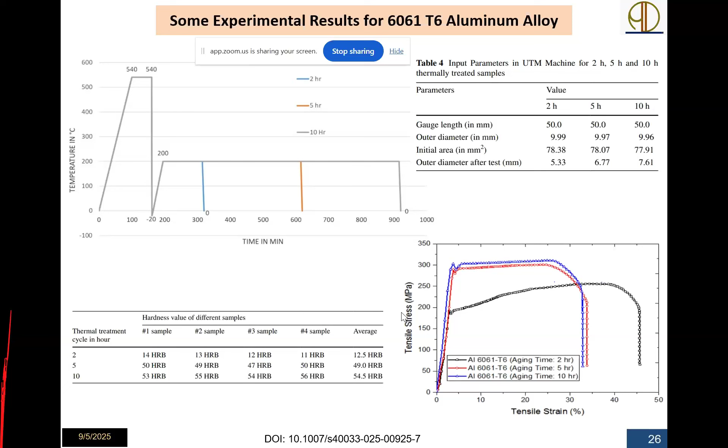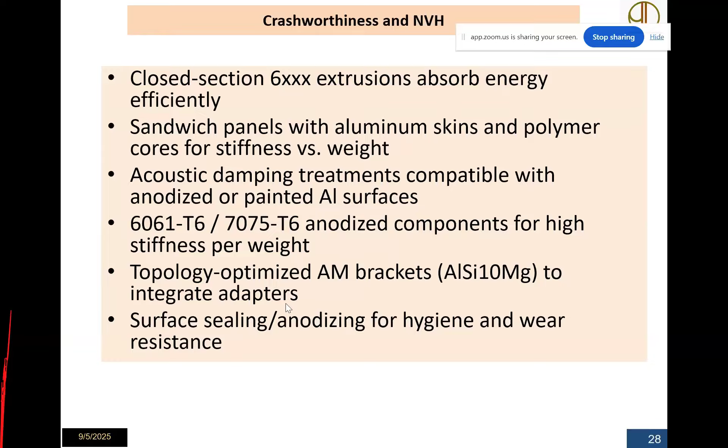Additive manufacturing routes can also be taken for producing aluminum-silicon-magnesium alloys, which can be used for biomedical applications. Now the main conclusion is that in the aerospace domain, 2 series and 7 series are quite widely used, and aluminum-lithium remains the structural workhorse.

Additive manufacturing is also nowadays playing a good role in fabricating aluminum alloy for complicated parts. In the railway domain, 5 and 6 series are used; it is weldable, corrosion resistant, and lightweight, and is also used in car locations.

Biomedical application is mainly for instruments and prosthetic frames, though presently in implant locations it is avoidable. In the cross sector, additive manufacturing application through this route allows complicated parts to be produced nowadays, and friction stir welding is also used. Aluminum is sustainable, easily recyclable, and that's why it is widely used.

Though nowadays the 2D material graphene is regarded as a wonder material, aluminum is also kind of a wonder material. You may see on the Aluminum Association website that it is also regarded as a wonder material because of its wide application and wide benefit in every sector.

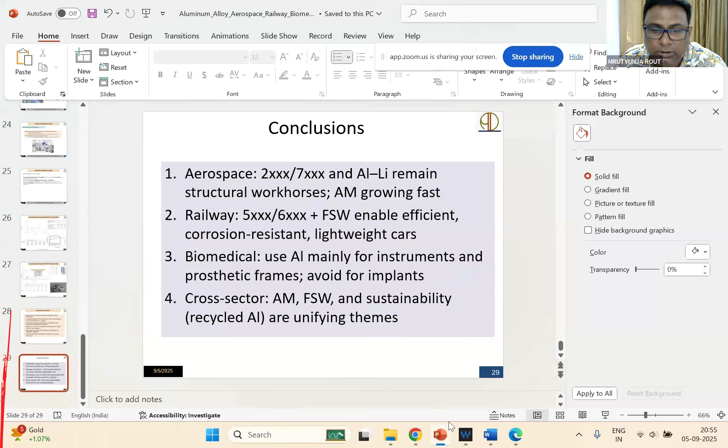Good evening, sir. Good evening. Is there any biocompatibility issue of aluminum for biomedical applications?

Yes, aluminum is not that much biocompatible. It is toxic when it comes in contact with human bone or human blood. It does not behave properly like a titanium alloy or magnesium alloy, so there is a biocompatibility issue. That means it cannot be directly used for implants.

So aluminum alloy is not a good recommendation for biomedical implants, but there are a lot of other areas in the medical domain or medical field where we can use aluminum alloy. And nowadays, some aluminum composites with magnesium, silicon, zirconia or titanium oxide are under research stage. But still, compared to titanium alloy and magnesium alloy, it is not recommended as a bio implant.

Okay, thank you, sir. Okay, anybody else?